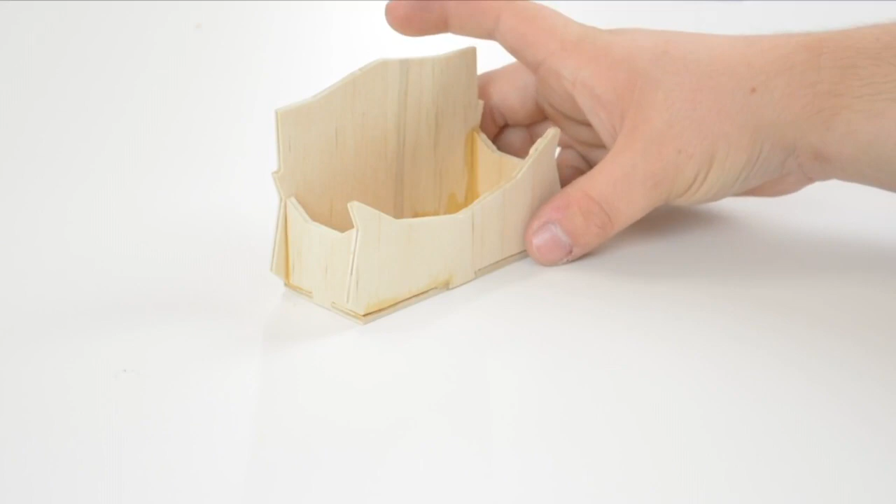Today I wanted to go over how to create the makeCNC.com cat head business card holder. We've done a tutorial on how to do this within Vectric software, such as Cut2D or VCarve Pro. But we haven't really delved into how to do so in Fusion 360, and that's what I wanted to cover today.

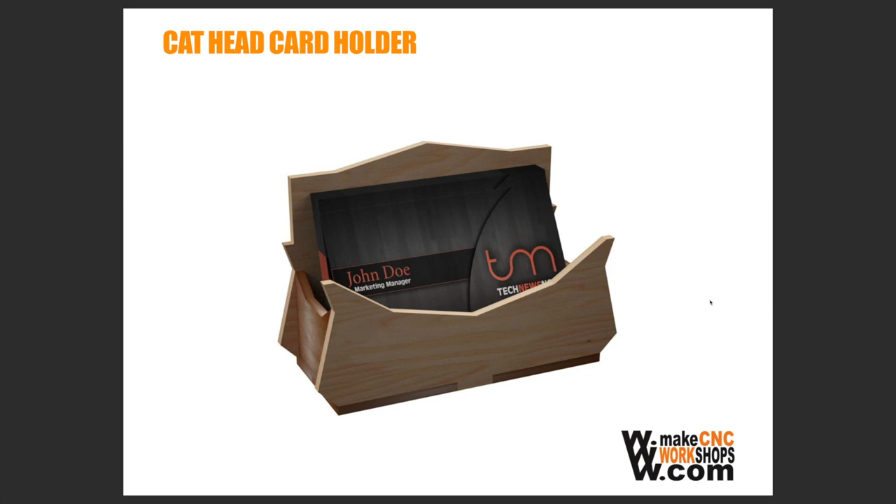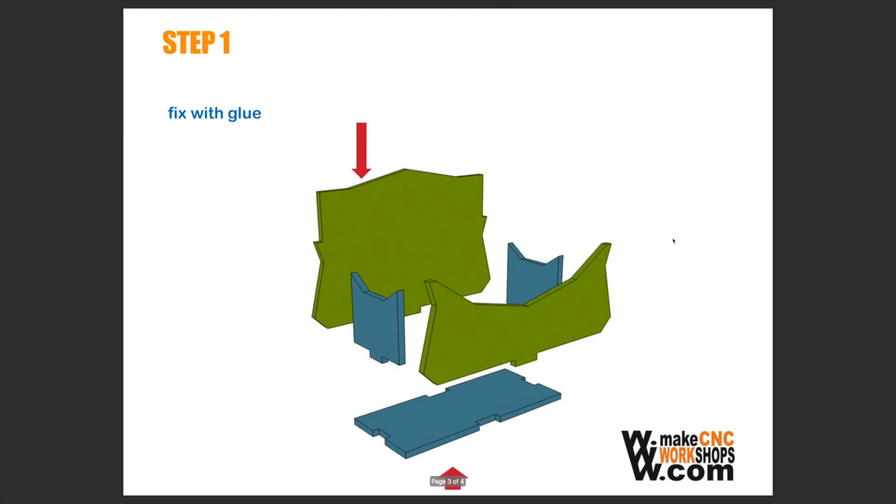So here we have the PDF that is from makeCNC.com. This is the PDF that comes with the project itself, and you can download it in a .dxf format, which is what we'll be using. So you can see here we have the parts list, the instructions, and what the final project will look like.

Now before we dive right into our CAM, I just wanted to quickly cover the inside corners. These are 90-degree angles. Now that's an issue because if you've used a CNC machine before, you realize that all the tooling is round. And the solution to that is what we like to call dog bone fillets. Dog bone fillets, because of how they're recessed into the piece, allow for a perfect edge-to-edge fit, whereas a normal fillet would leave a curved radius.

So let's begin our file creation in Fusion 360. Now we want to begin by actually making the dimensions of the stock we're going to be using. And we can do that by creating a sketch, selecting our plane. We've moved to our top face. And I like to use a little shortcut. You can hit S and you have all your shortcuts here. I like to use a 2-point rectangle. This allows me to start with the bottom left corner at the very center of our coordinates.

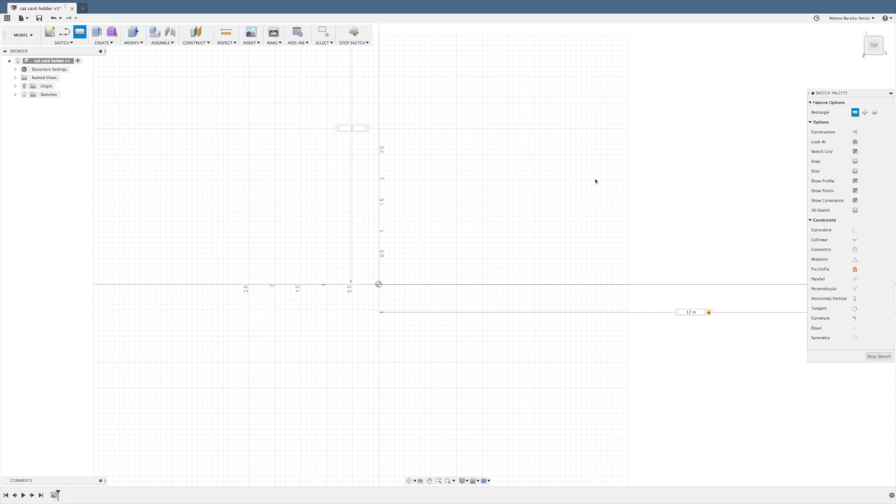So we can move out. We want it to be 12 inches in length by 6 inches in height. Now I actually made this 8 inches. I wanted to give myself an inch on each side for the clamp hold downs that come with our D-series machines. They're a great work holding solution. They allow you to do a lot of stuff right out of the box, and I wanted to incorporate them into this project. So I gave an extra inch on each side so that there'd be enough room for the tool to cut its project out. So once we have our dimensions, here's our stock.

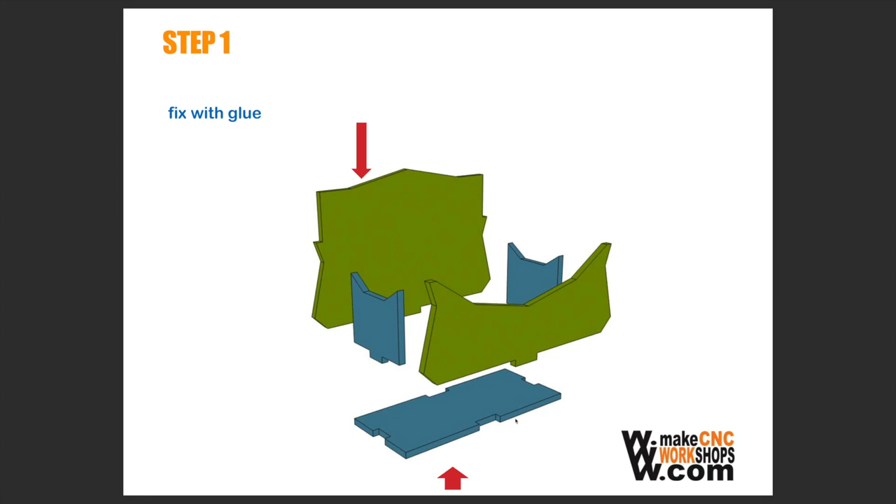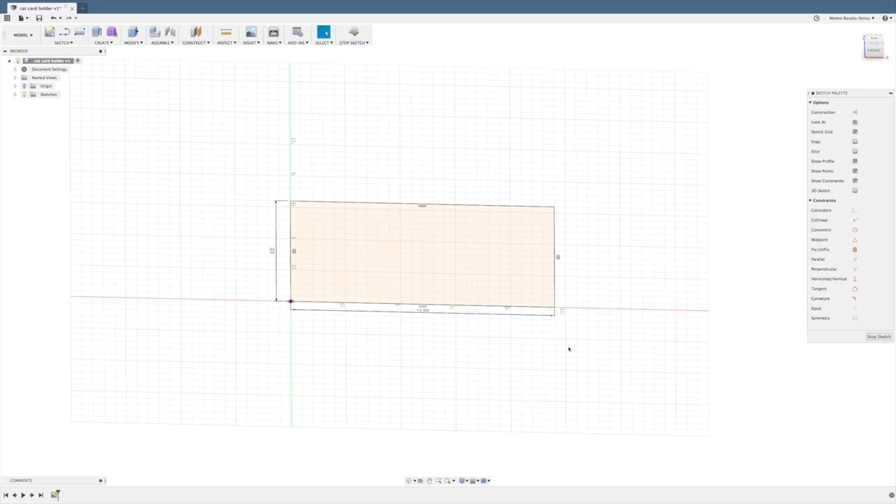Now there's something very important to remember when you are creating a project like this, where this piece is vertical and it slips into this little notch which is horizontal. The thickness of your stock is going to dictate how well this piece and this piece fit together. So it's very important to measure your stock. Now, if we take a pair of calipers to our stock, the example piece that I'm using is, instead of an 1/8 inch, 0.125, it is 0.124 inches thick, meaning I'm going to have to scale my project to the correct dimensions so that everything interlocks.

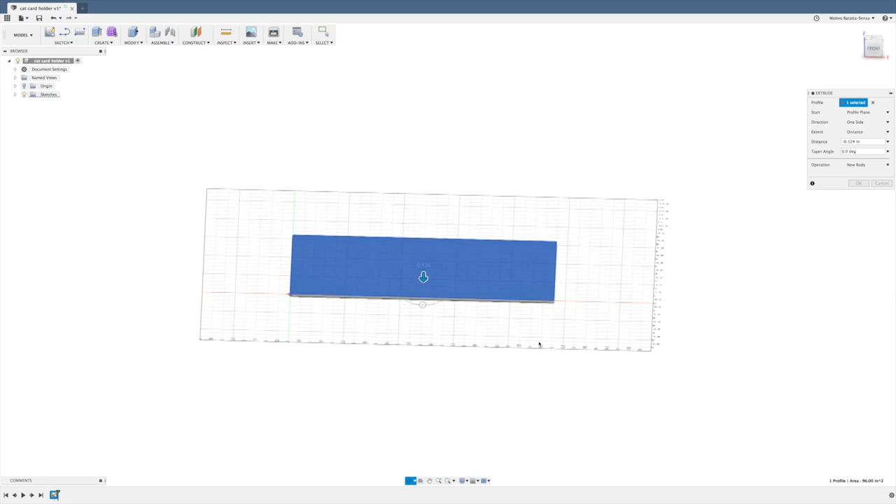To do so, I'm going to start by fully modeling my stock, and I can do that by hitting E or selecting Extrude up here, and I'm simply going to extrude it down the thickness of my stock, so 0.124. And I extrude it down so that it's easy to place my DXF file right on top. Hit enter, and as you can see, we've now created our stock. So this is essentially the material that you'd put in the machine.

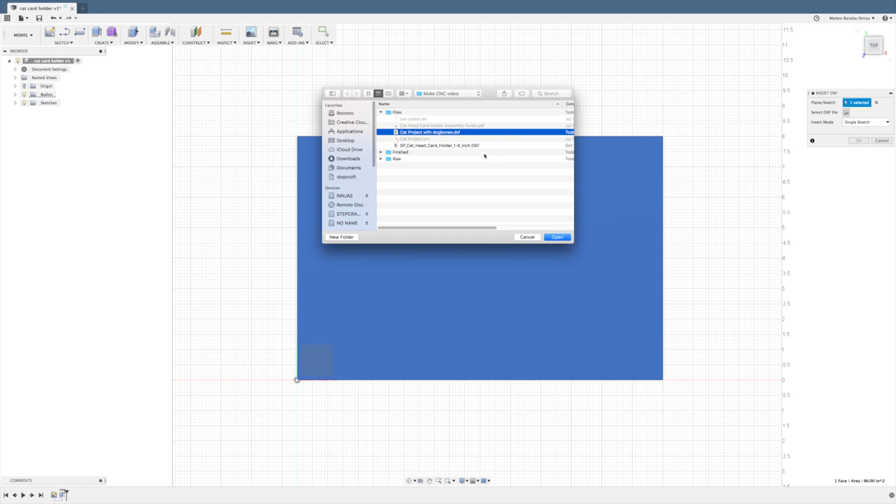Once we have our stock, we can move to our top view and select Insert, and we want to insert our DXF. Now, this DXF file that we're using for Fusion is a little bit different than the normal DXF that you would use with Vectric. As you can see, it says with dog bones, and I'll cover that in one second. So if we open that sketch, just importing, and there we go. So now we have our sketch right here, and we can actually move it around.

I'm just going to move it about an inch off the bottom, so it's sort of centered between those two pieces where I want to have that work holding. We can move it over a little bit more. That way we can almost get two projects out of this one piece of stock, which is really handy. This has been moved around so that the space is saved.

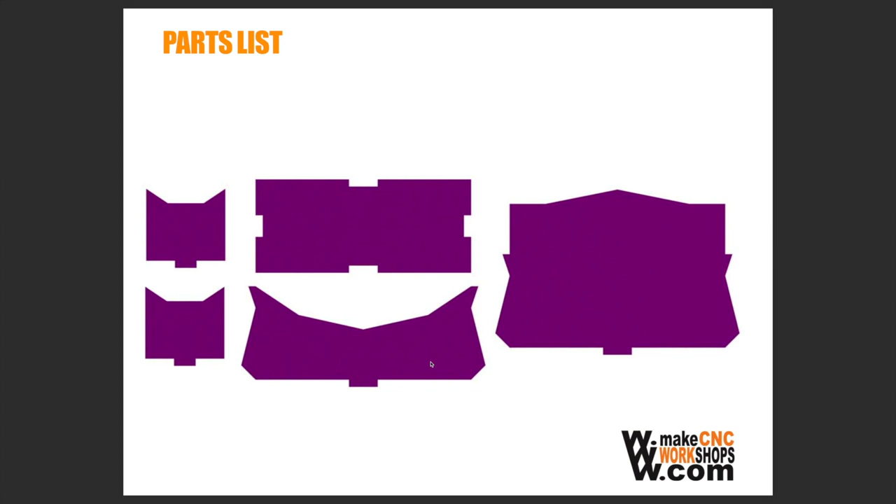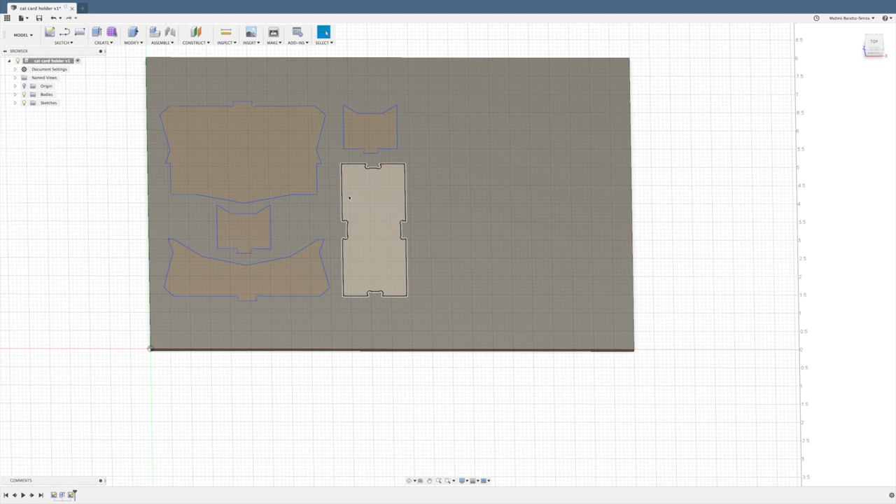You can see here in our preview, this is how the DXF imports by default when you download it from makeCNC.com. And this is just fine if you have expendable stock, but by rearranging these, as long as there is a 1/8 inch distance between each piece, you can save a lot of room, as we see here. So now that this DXF is inserted, we can hit OK, and our DXF is inserted right on top of our stock there. So we have enough room there for our clamps.

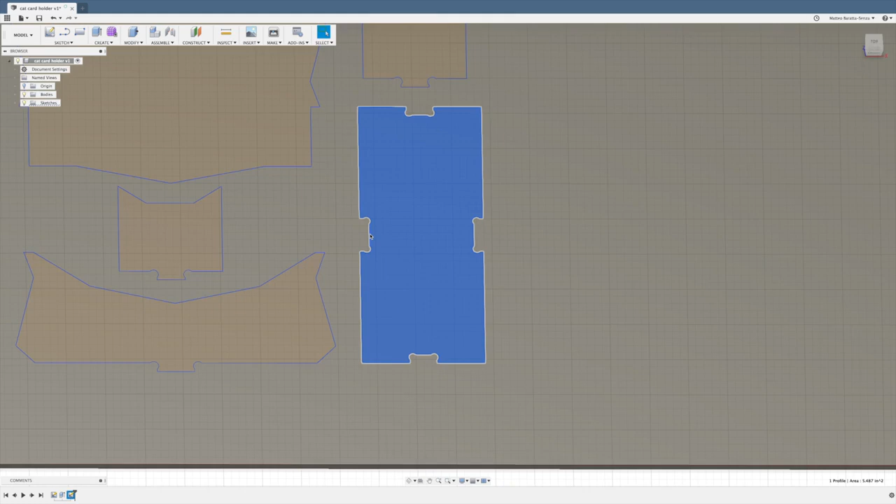Now, I wanted to quickly touch on what dog bone fillets are. In Fusion, you are unable to create dog bone fillets without an extension or without hand drawing them yourself, both of which defeat the purpose of an easy first project tutorial. So what I did was I took my DXF file from Vectric with the dog bone fillets already made and imported it back into Fusion. We offer this modified DXF file for those of you who are using Fusion 360 to create their project.

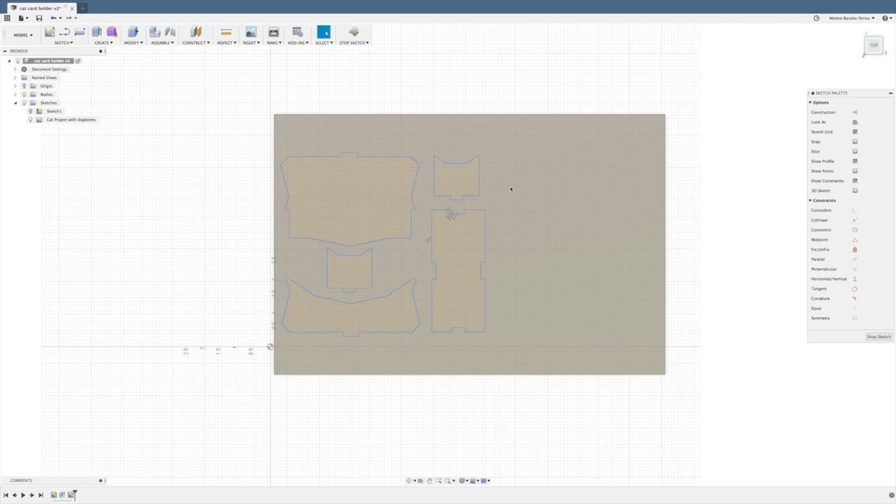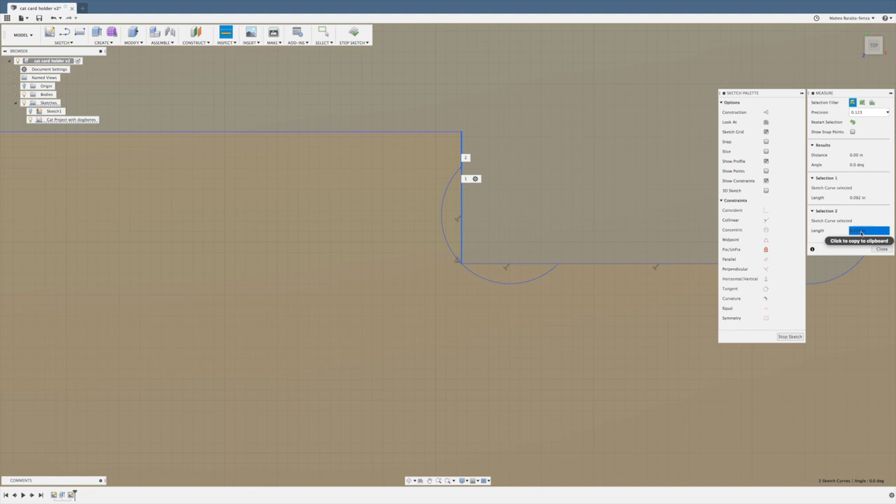Now, before we continue, I just wanted to explain something briefly. If you look here, I've created this line here, as it's important to understand why we would scale a project. So if I hit I, which is inspect, and I select this line, and then I select this one, these two lines, 92 plus 33 is 125. So we can see that this length is 1/8 of an inch. It's exactly where that 90-degree angle would be without the dog bone fillet.

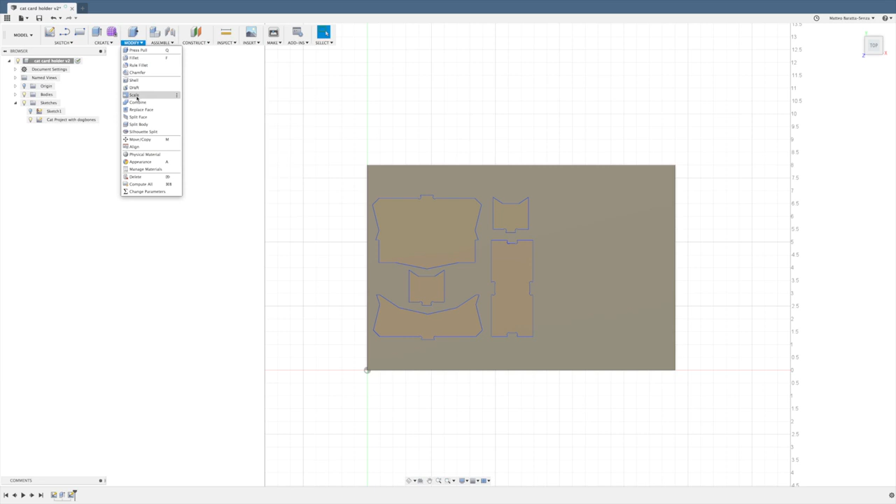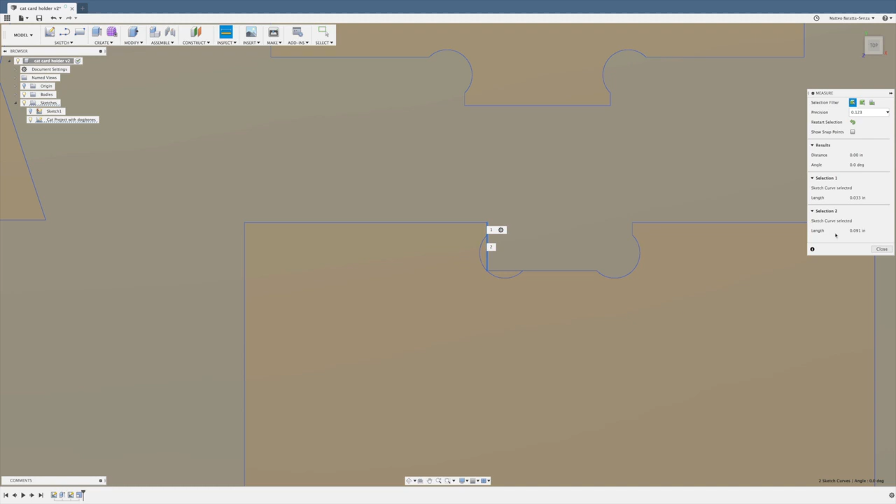So we can go ahead and scale our drawing. So select scale, and then the entities that we want to select, and we change that to 0.992. Now, if we go back to this little example that I showed and hit I and inspect these two pieces, you can see there is a 1 thou difference now, which means it would be 0.124. So now the project is scaled correctly.

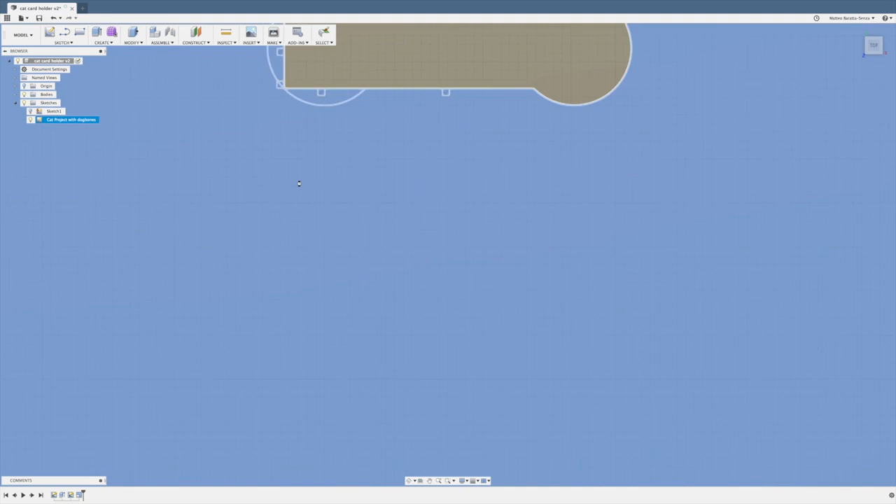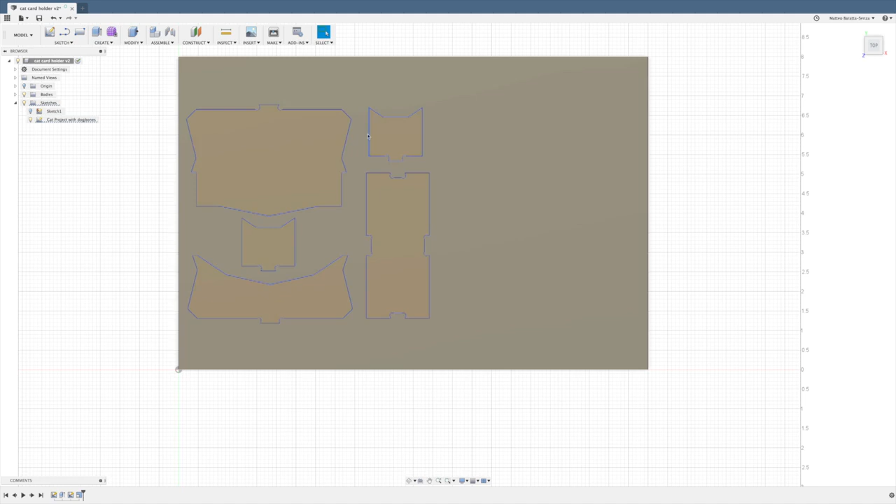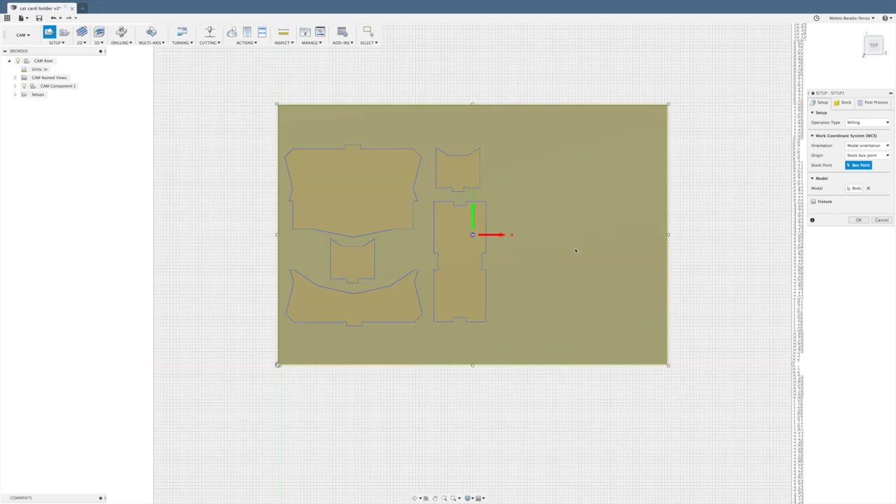In our case, our stock is pretty close. So I'm just going to clean these up really quick. There we go. So now that our project has been scaled, we are ready to run our toolpath. So to do so, we can move over to our CAM environment. Now we're in our CAM environment, and I actually want to change my unit type to inches. There we are. And we can do our setup. So here's our setup. We have our X, our Y, and our Z.

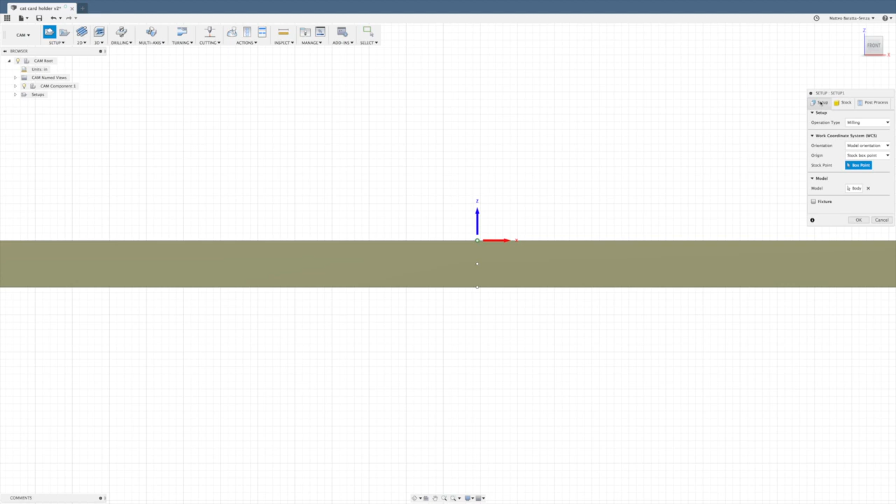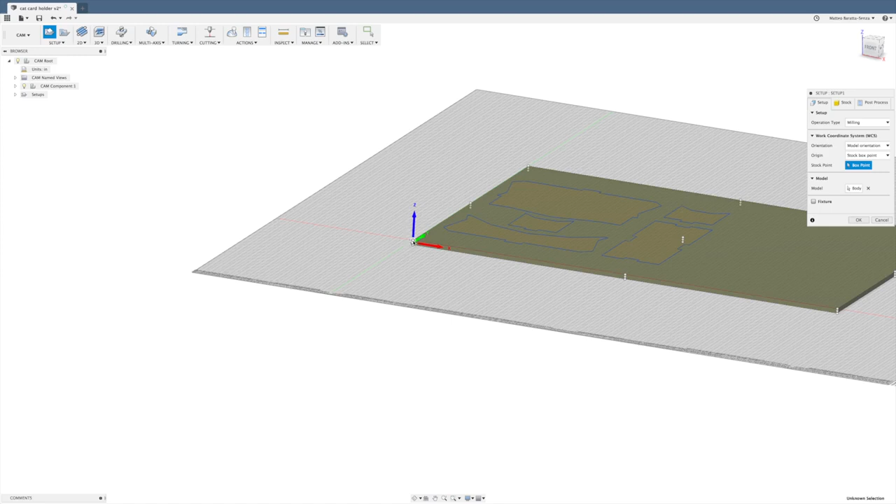Now I like to start at the front and make sure that it's starting at the model. We have some stock, which I want to change. I do not want any additional stock. So I want our start point to be right at the top of the work. Now our setup, I want to do something a little bit different this time. I actually want our stock point to be the top. There we go. So our starting position is actually at the very corner of our workpiece, right where the drawing begins.

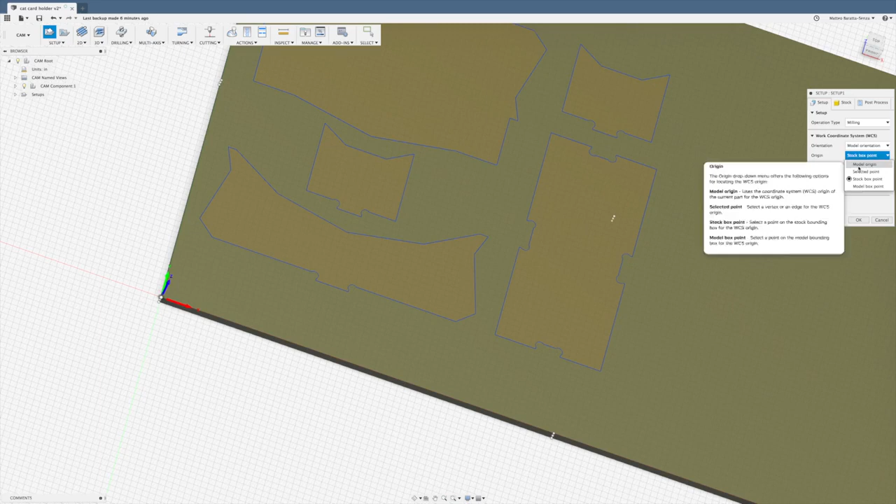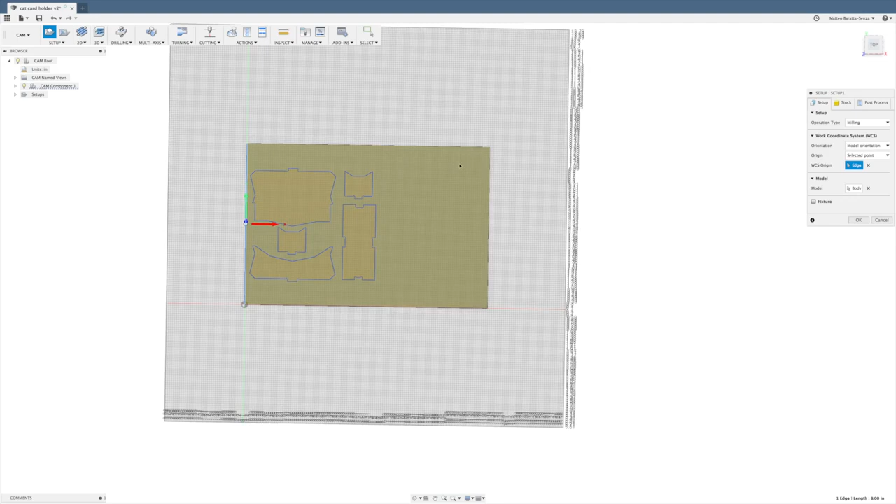And you know what I'm actually going to do? I'm going to move that up here. And I did that just by selecting origin, selected point, and then selecting this line. And I did that because I gave that extra inch on each side for the clamping bars. And if my spindle were to start here, it would actually run into my work holding. So being conscious of your work holding when creating CAM is very important.

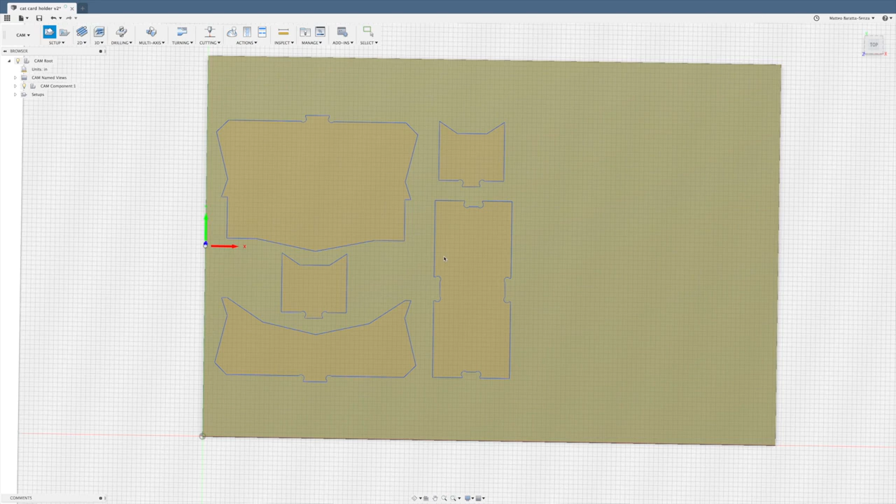So now our setup is complete. We can see our height in Z. That's the correct width. And we can hit OK. And our setup is done. So once we have our setup, we can move into doing our toolpath. So we're going to do a simple 2D contour. Select that. And now we can set up our tooling. So we select our tool. And this is one that I've created specifically for this project based on the actual tool I'll be running.

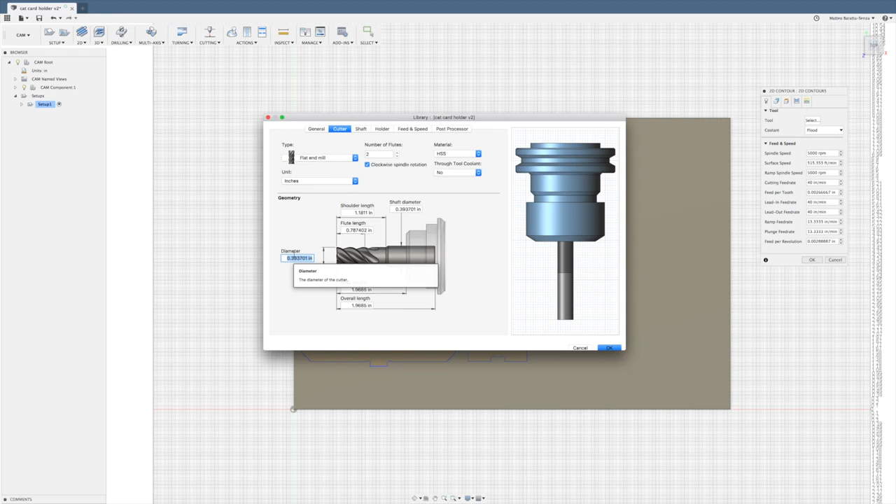Now, to create your own, simply select this icon and select the type of end mill you have and the number of flutes, and then fill out this information as applicable. Sometimes you'll have a different tool for different projects. Of course, you can build a tool library based on the tools you own personally, but these vary. The only thing that's going to be the same for everyone watching this video is the diameter, which is 1/8 of an inch. So I have this 1/8 inch end mill that I've created here, and I can select OK. You'll see it's loaded up in there.

Now, the main things that we're going to worry about is our feed rate and our spindle speed. Now, spindle speed you don't have to worry about if you have an MM1000 or a Crest spindle, something that isn't electronically controlled. If you have an HF500 and you're interfacing it with makeCNC to control the RPMs through the software, that's something that you'd set here, and you could set that at 12,000. Personally, I will be using an MM1000, so this is not important to me. For those of you who are using an MM, I found the optimal setting is around 4 on the dial.

Now, our cutting feed rate is going to be 26.322, and that is in inches per minute. That is about 10 millimeters per second. Now, feed per tooth is fine as it is. Our lead in and lead out feed rates, we want to keep the same. So we can actually take this value, copy, and just paste that in.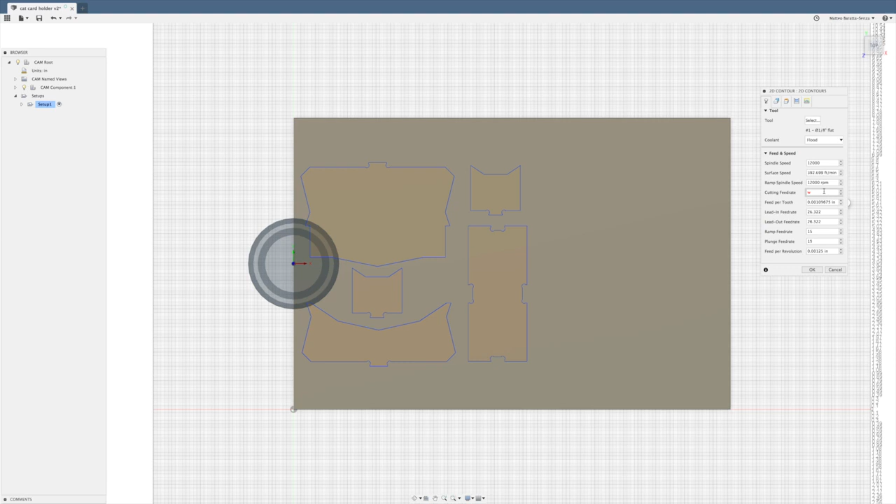Now we can move on to our geometry. So we simply select the contours that we want the bit to cut out, and then these little arrows, we actually want them on the outside of the line, as that means the bit is cutting up against the outside line as opposed to on it or inside. You'd use inside for a pocket operation. There we go. Now we want to set up some tabs.

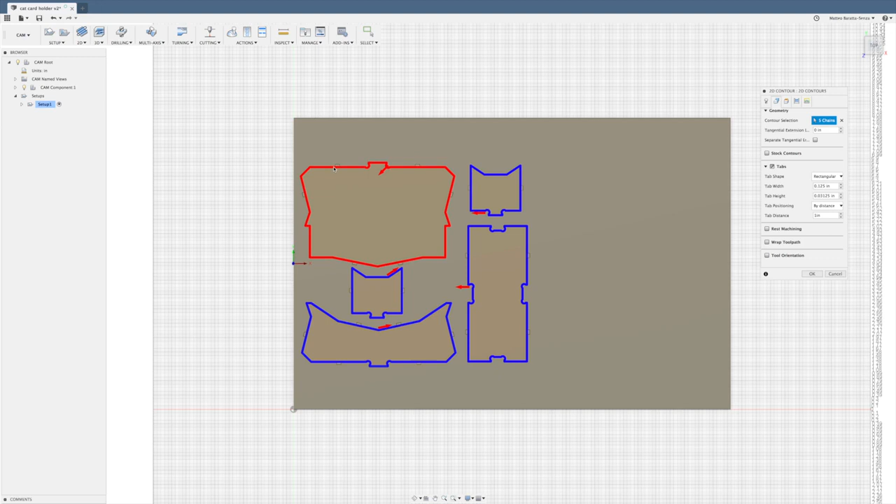Now I know this looks strange when it looks like it's inside. It's not, and you can tell that by the location of the tabs. If these were on the inside, it would be cutting the inside line. That's a nice way to check if your arrows are correct, because sometimes in situations like this, it's kind of hard to tell where it's actually cutting. It's indicating that the tool is going to travel this way and into the piece and then back out. But that's hard to tell from that view.

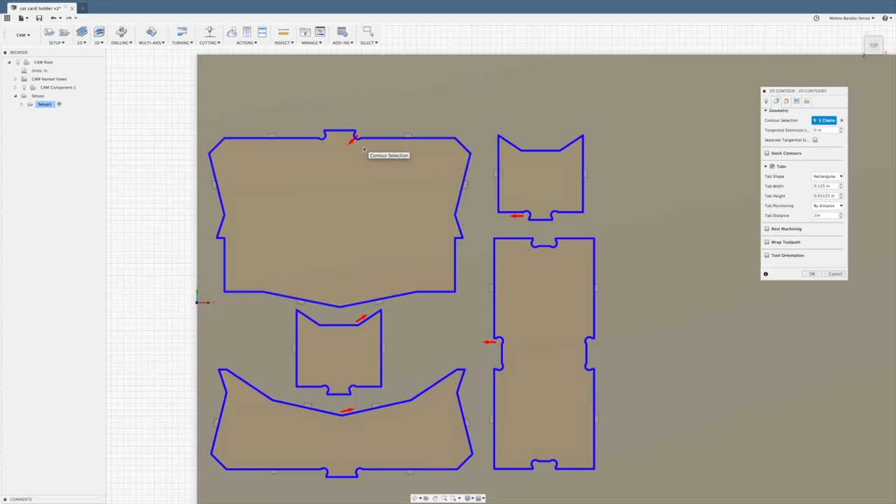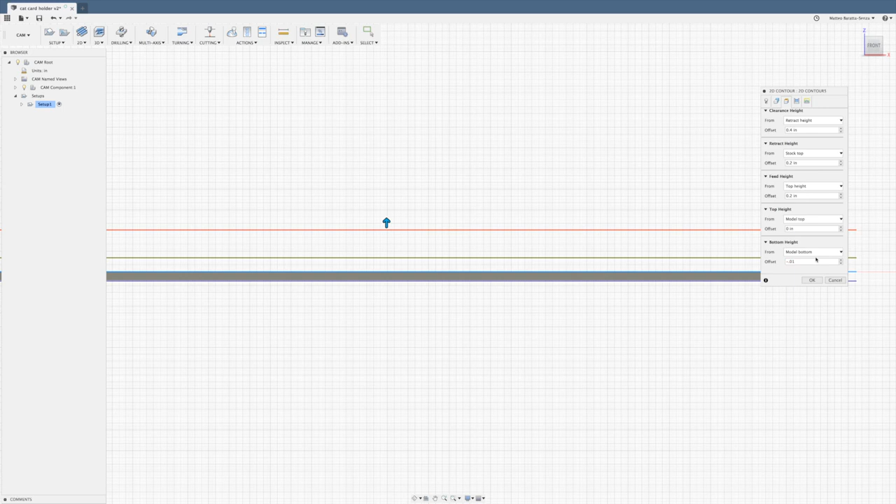So now that our tabs are set up, we can go to our heights. Now we are in the top view, but we can actually move to the front, so it's pretty easy to visualize. My top height, I want to start at the model top, and the bottom height, I want to be the model bottom. I want to give the bottom height a -10 thou offset, which allows the spindle to pass all the way through the piece.

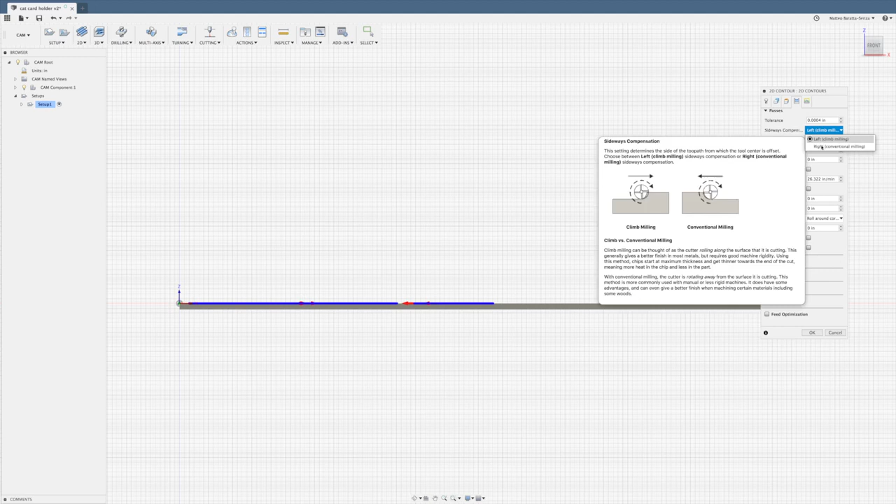When doing this, just make sure you have a sacrificial board underneath, because you don't want to damage the bed of your machine as the tool is passing all the way through. Everything else should be fine. Now we can go to passes. Our sideways compensation should be on conventional. Everything is fine. We don't need to do any finishing passes or anything fancy like that.

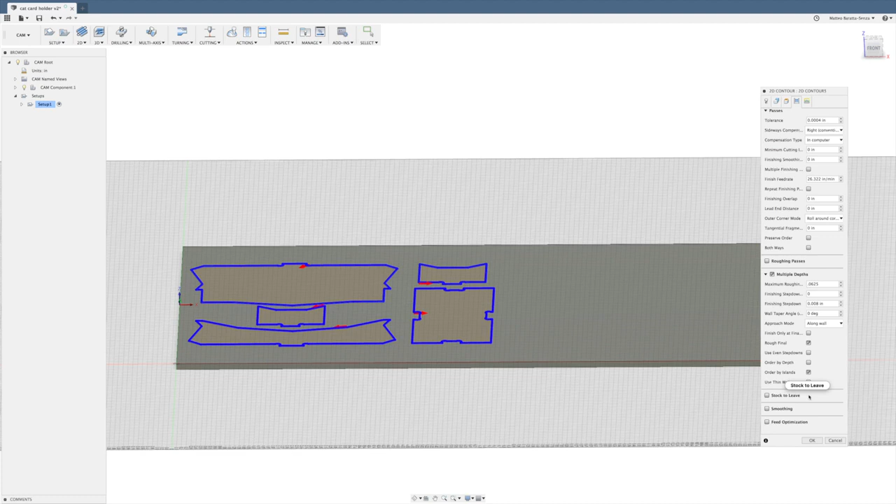We simply want to do multiple depths, and our step down should be half the diameter of our bit, so that's 0.0625. We don't need a finishing step down. Everything else is just fine the way it is. We can go to linking. We want to preserve rapid movement, allow rapid retract. We can keep the tool down as much as possible.

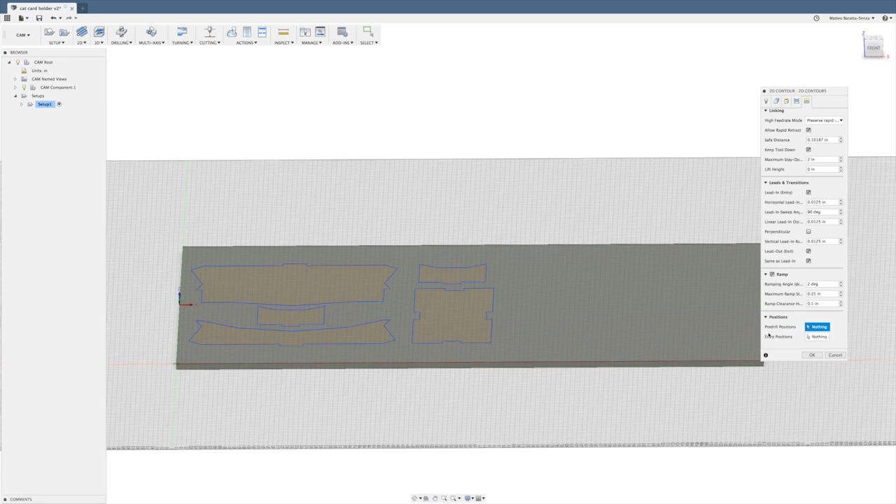And for our lead-ins and transitions, we can keep it as is. We can add a ramp, and this is useful because instead of just plunging directly in, it will do a sort of ramp in, and that puts less stress on the tool and on the machine. So once we've done all that, we can hit OK, and it's going to render our toolpath. So now that this is all rendered, we can actually simulate and see how that works.

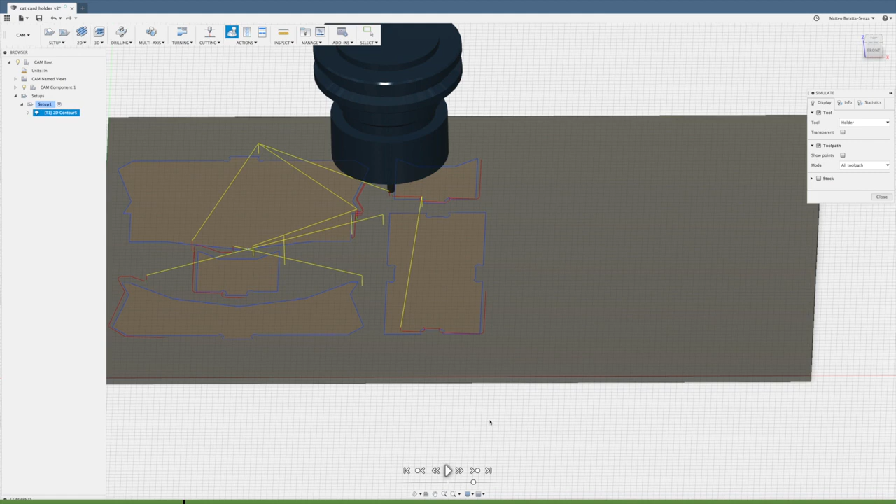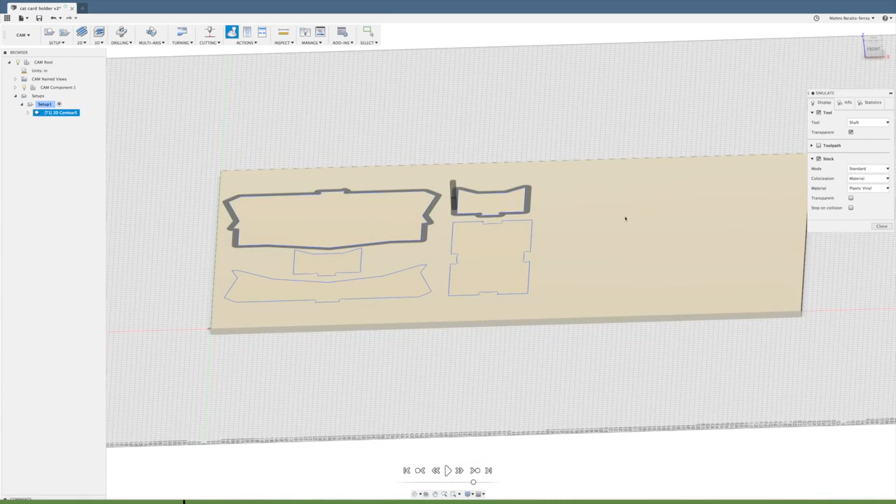Now when I do a simulation, I like to make my tool transparent and just show the shaft of the tool. I like to turn my toolpath off, and I actually like to turn my stock on and to plastic vinyl. It helps kind of visualize the cutting operation here. And lastly, I like to turn my CAM component off, as you get to see the actual workpiece as opposed to your model showing through as you cut.

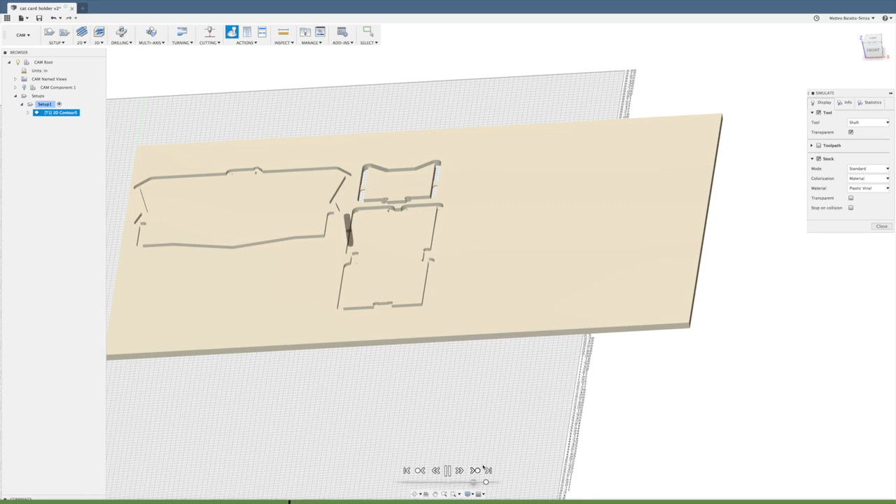Run that simulation. We can speed it up if we want to, make it a little easier to see. You can see it's cutting those tabs. On that last pass, it's keeping that material there. And it's all done. Now that we're all done with our toolpath and we've simulated it and everything is to our liking, we can do our post-process.

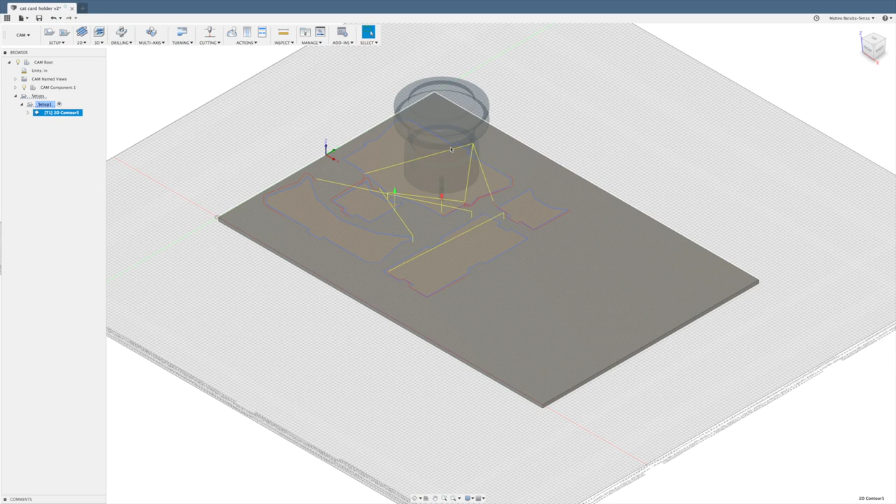I'll quickly go over how to generate a file to run on our machine from another recent Fusion tutorial I've done. This short clip will walk you through exactly how to download, install, and save your file to run it on your machine. Simply go to the link above and enter into the search bar StepCraft. Once you find StepCraft CNC, select Download and Save File. This will save as a .cps file.

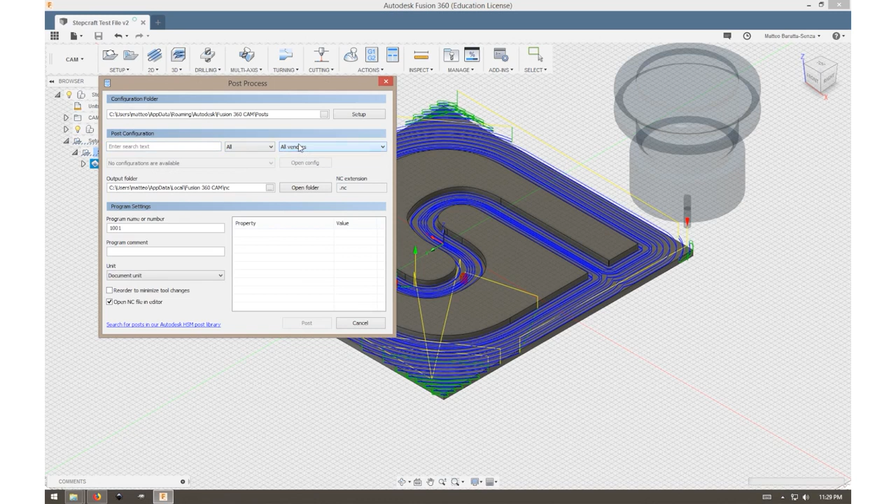Now to make this process a little bit simpler, we can go back to Fusion 360, and in our post-process, we can select Setup and use a personal post-process. This will allow us to copy this file location and paste it into the download, allowing that .cps file to go directly into our personal post-processor folder. Now, it will not appear by default. You'll actually want to cancel your post-process and reselect it.

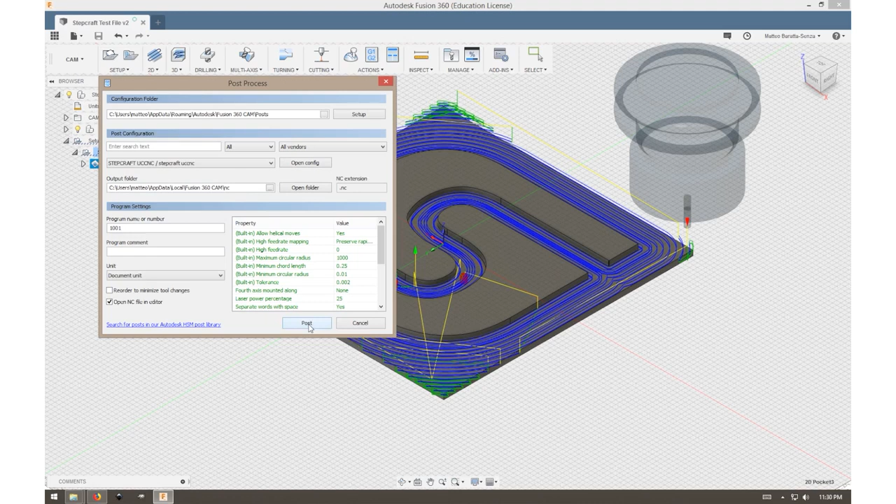Then go to Setup and Personal Post Library, and we should have our StepCraft post processor appear by default. Once that's all set, we can select Post, and it will prompt us for a file location. I'll call my file StepCraft test file and save it to my desktop. This file will save as a .nc file. Simply load the .nc file into UCCNC and you're ready to run your project.